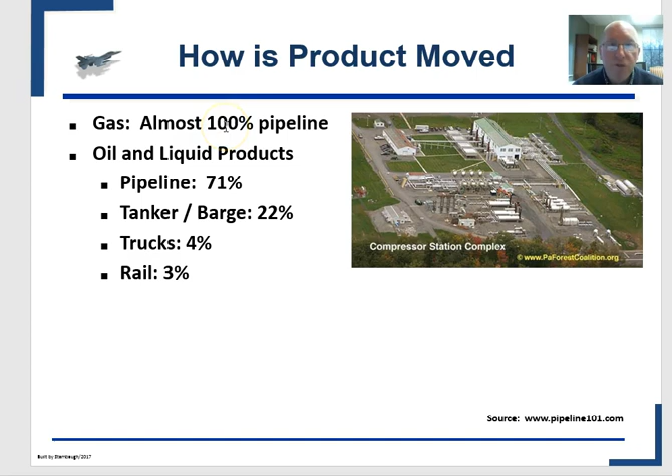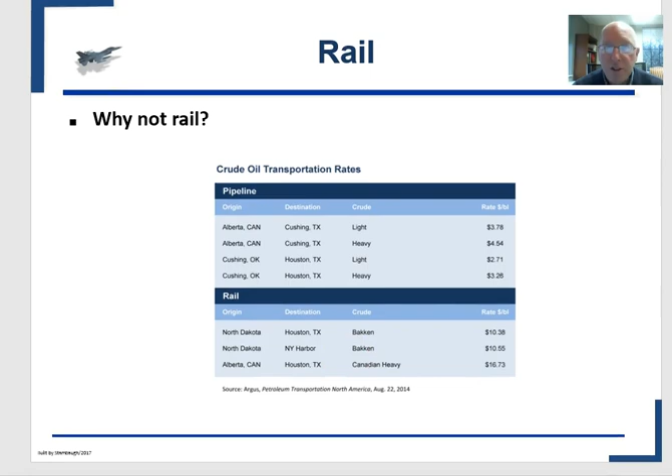Let's start with the midstream industry. I want you to remember, proportionally speaking, what products get moved more by pipeline than others. Also remember our class discussion on why rail shipments took off, and remembering the discussion about the economics of rail versus pipelines, and the safety records, will help you answer those questions.

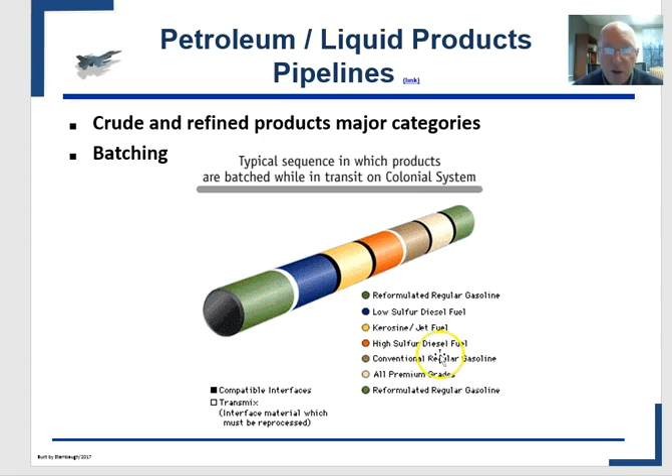So the slides I'm flipping through obviously mean they're not the source of a question. There might be a question about batching on the exam. I don't know why that one's being so frustrating.

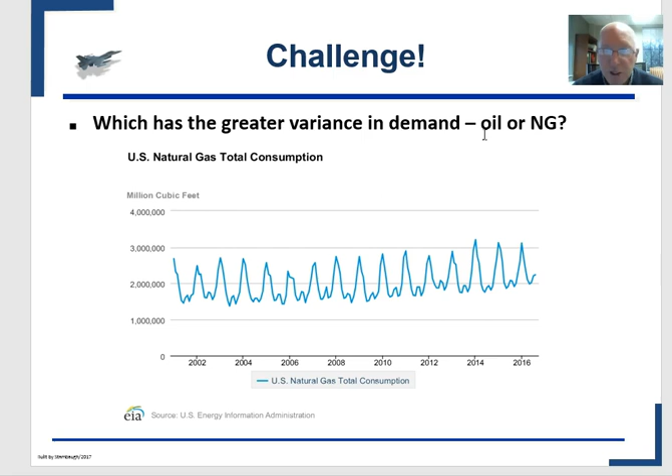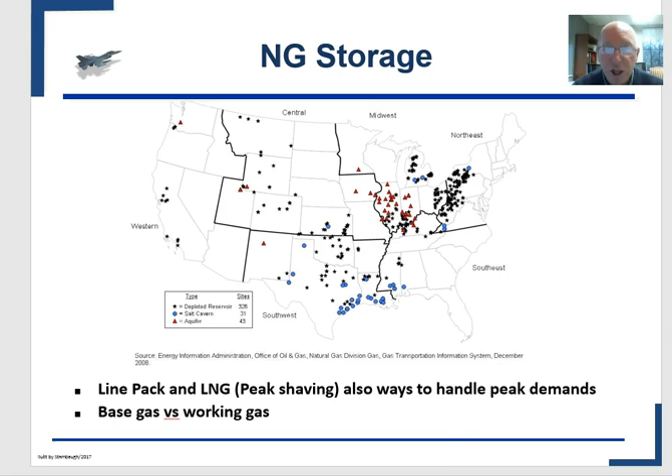Okay, this is another source of a question. What has greater variance in demand on a daily basis, oil or natural gas? Obviously, it's natural gas. So think about ways the industry handles that daily variation. As I make this video, it's snowing outside, so it's a cold day. All of us are using a lot of natural gas today, probably. At least my house is heated by natural gas. And so we see that practically put into place.

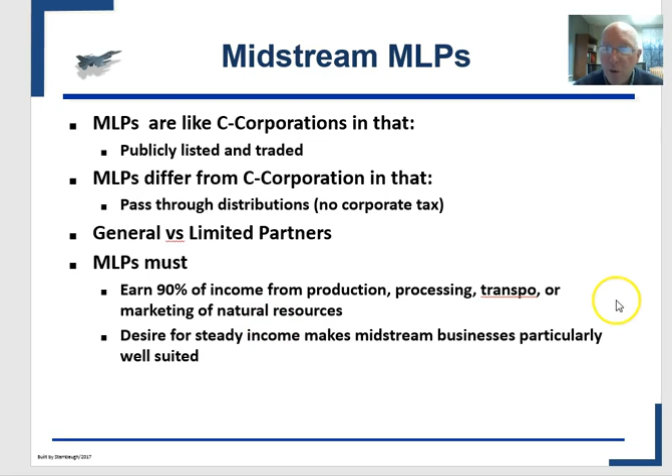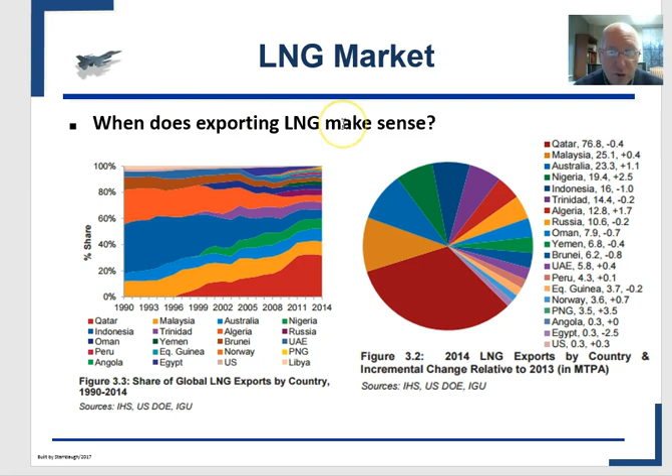As far as the LNG market, there is a question on it, and you're going to want to understand when it's good or logical for a country to export LNG, and when it's logical for a country to import LNG. Some of the major players in both of those markets would be good to know.

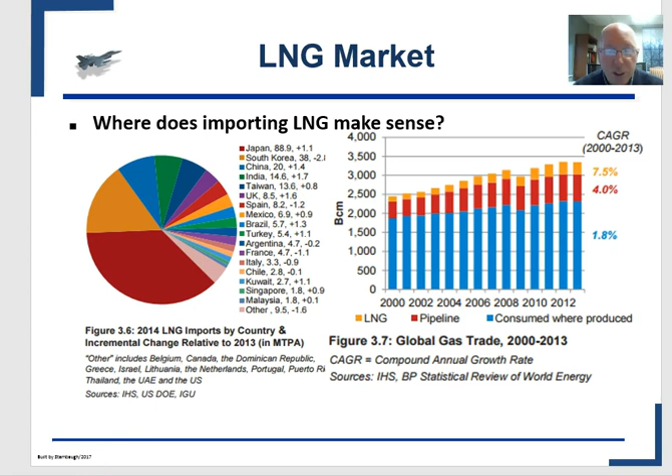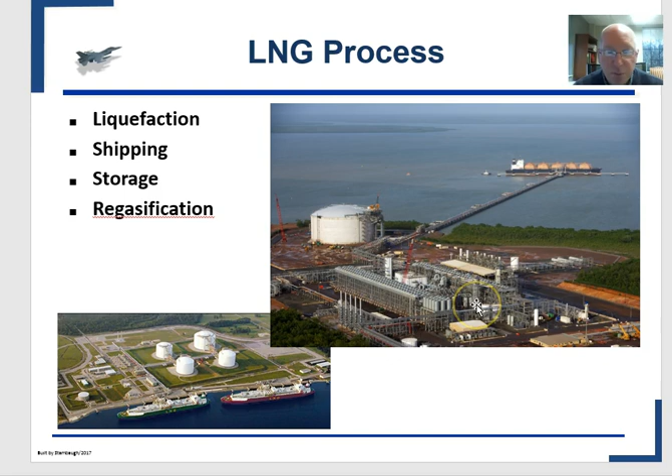One other thing good to know about LNG is that the most expensive part of the process is the liquefaction. This is the liquefaction plant in Sabine Pass on the Gulf Coast, and this is where all the bucks are in the LNG process. It's relatively easy to regasify it once it gets to its destination.

Now we turn our attention to the downstream industry. I do want you to know some of the physics and the business of the refining process. I'd like you to make sure you know where the refineries are clustered, and especially that the majority of them are on the Gulf Coast of the United States.

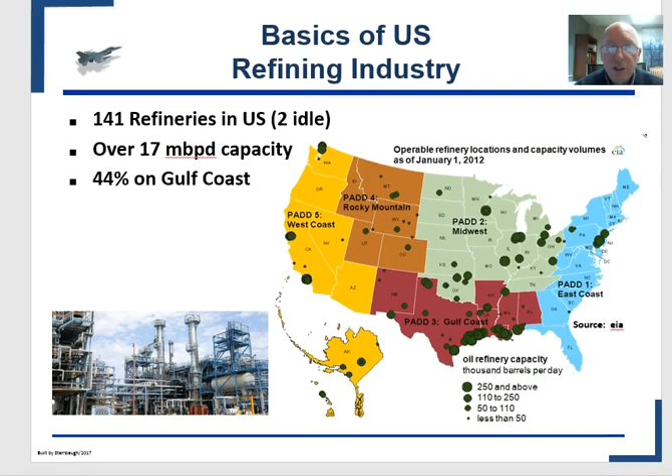Don't need to know this sort of stuff. I do want you to be familiar with the product slates and the basic functions in the distilling industry. Just keep in mind, too, the value—these are the high value products, sometimes called light distillates, not very often. Gasoline is by far the one produced in the most quantity and is the most valuable. Then you have jet fuel and diesel fuel—these are called the middle distillates, and I'll show you that on a chart. This is the real heavy stuff, and it's less valuable.

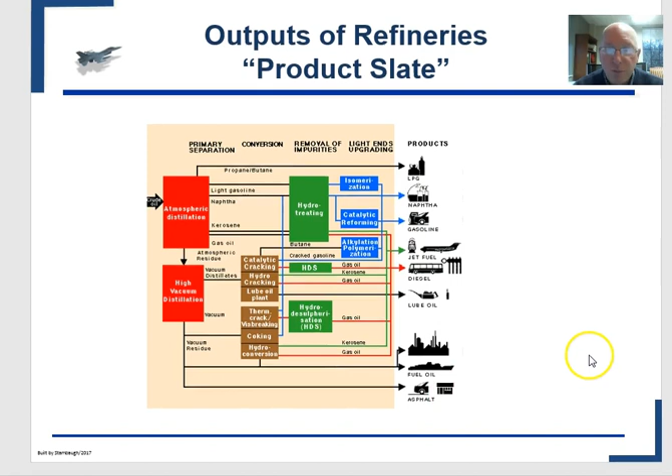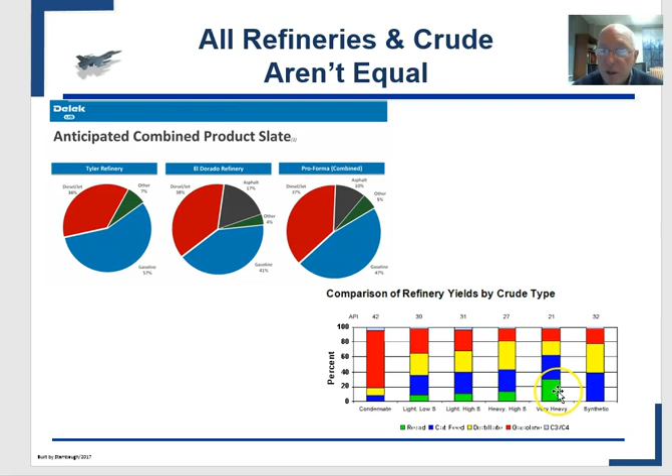Then as you go to heavier or more sour crude, you see the percentage of gasoline goes down, and typically middle distillates go up, although here, this very heavy crude produces a lot of the very heavy byproducts, like asphalt and things like that.

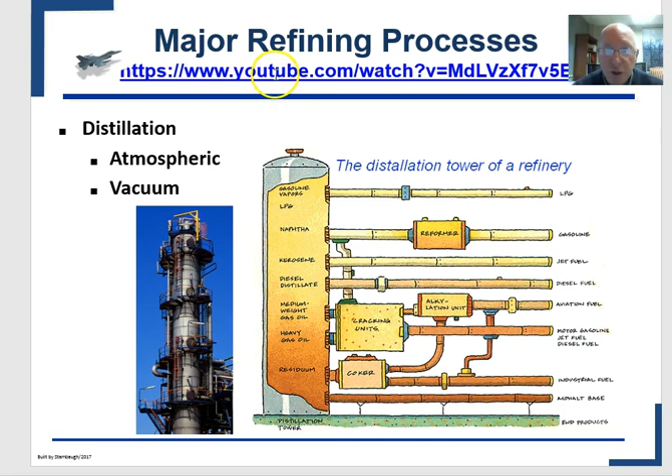Now for processes, you need to remember that the first stop is the distillation towers, and have a basic understanding of what distillation is, so you can rewatch this video if you'd like to. Then keep in mind on the next slide, cracking.

This is where you put a lot of energy into it, but I want you to understand that the basic purpose of cracking is to produce more high value products from a barrel of oil, particularly more gasoline. You're trying to get more gasoline out of a barrel of oil by taking some of the stuff that might not be as valuable—a middle distillate, or even worse than a middle distillate, some of the very heavy products—and putting it through the cracking process to make more gasoline.

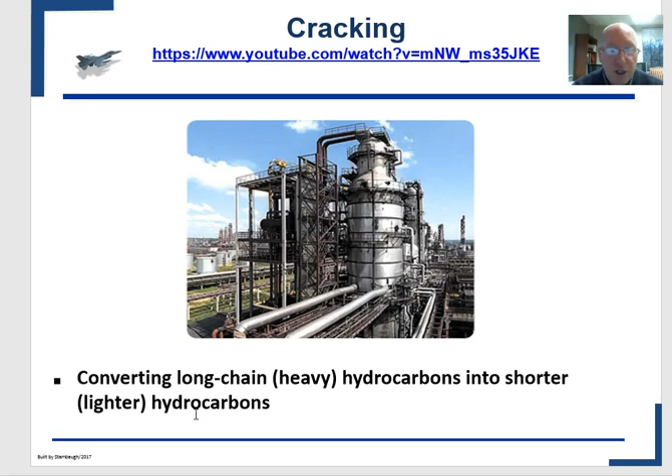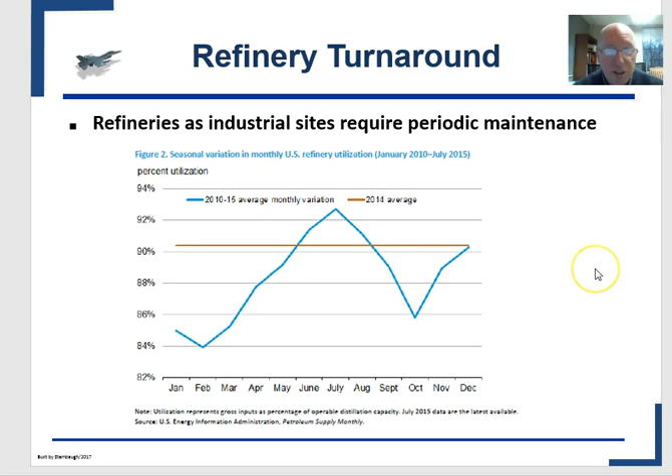Moving on, don't need to worry about that. I do expect you to remember that refineries are very busy places, on the order of 90% utilization for a year, simply because it's a very expensive capital asset, so you want to use it. Nothing else to be seen here. That's it for the downstream industry.

Shifting to the regulatory environment, I decided to start at the summary slide. One key takeaway is that state law, for the most part, guides oil and gas E&P operations. They set the rules for leasing, well spacing, pro-rationing, and those sorts of issues.

Federal law, there's a lot relating to environmental and safety issues. Even though states can have guidance on those issues, these are the areas where federal law tends to be most dominant. I also want you to particularly remember, go back and rewatch the video if need be, what was found from the 2017 EPA study on fracking. Be aware of that. Those are the two issues from the regulatory slides.

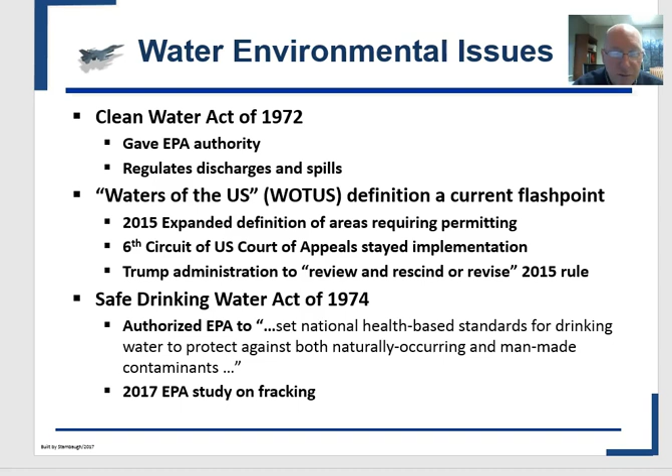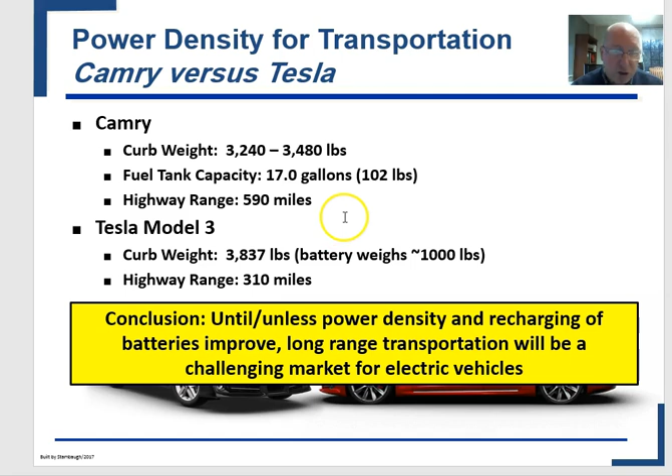On to renewables. We talked about the idea of power density, which is how much energy something can have per pound. This is the real issue with long-range transportation vehicles, the power density of renewables, the batteries in electric cars, and believe it or not, they're starting to have some electric airplanes. They're just not enough for long-range transportation under the current formulation. This idea of power density is important to keep in mind.

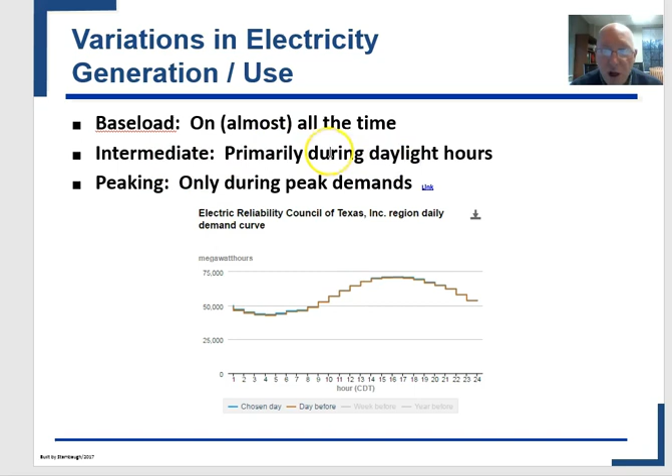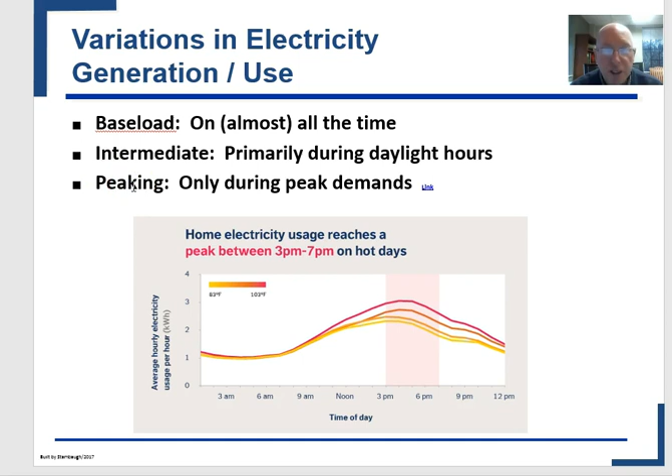We also talked about electricity usage and how power demand varies throughout the day. Base load sources are basically always on. Intermediate sources come on to take care of the normal daily bump, and peaking sources handle hot days when power requirements are at their absolute peak. So base load runs all the time, intermediate runs not all the time but on predictable bases, and peaking runs only when you really need power to keep up with a spike.

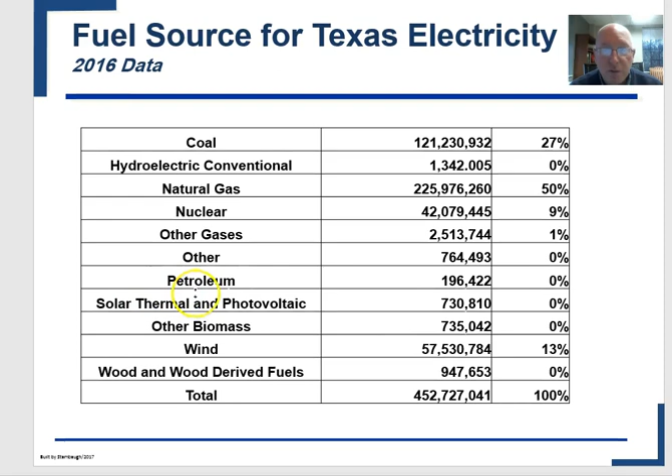Moving on, a familiarity with this might be a little helpful, but there's not a direct question from that.

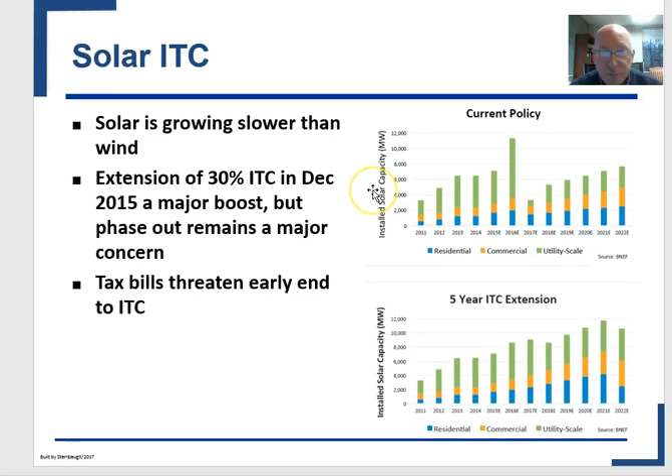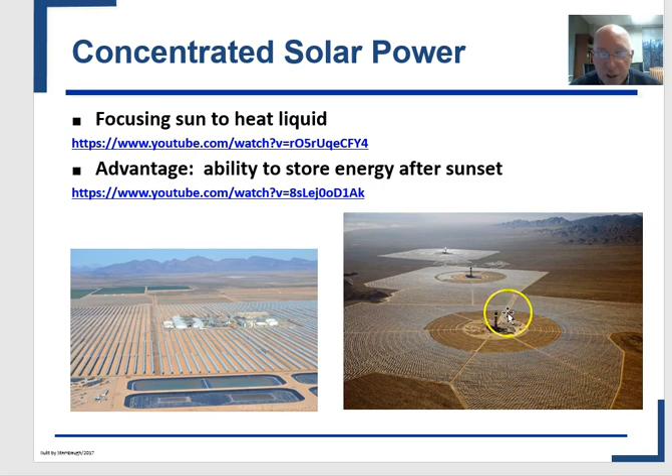I contrasted for you concentrated solar power versus photovoltaic. The real takeaway is that concentrated solar has the disadvantage of being more expensive than photovoltaic, but it has the ability to store energy after sunset, because once the material is warm it can generate power for a while. Photovoltaic has the benefit of being less expensive and more flexible.

For wind, know that the current production tax credit is 2.3 cents per kilowatt hour. That will be important to help you think through some of the questions.

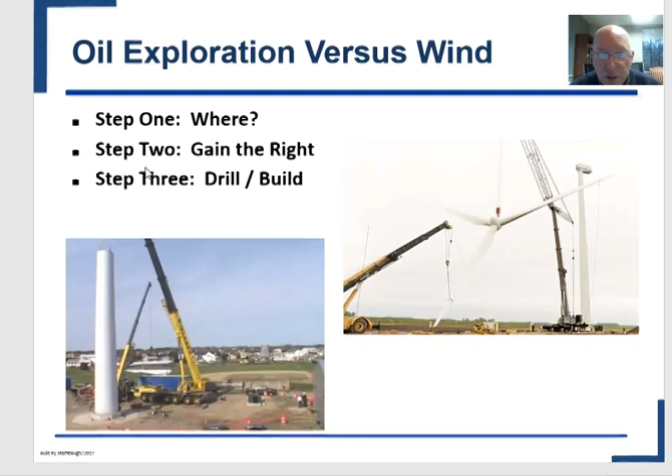I'm skipping over slides that you should already be looking at because they will help you with the longer answer questions I've already talked about.

Make sure you know this rule of thumb: it costs between 1.2 and 2.2 million dollars per megawatt to construct a wind turbine. So if I were to build a 5 megawatt generator, and I'm not sure they're even possible to build that big, I would multiply 5 megawatts times 1.2 to 2.2, which suggests how much that turbine would cost - in other words, between 6 and 11 million dollars.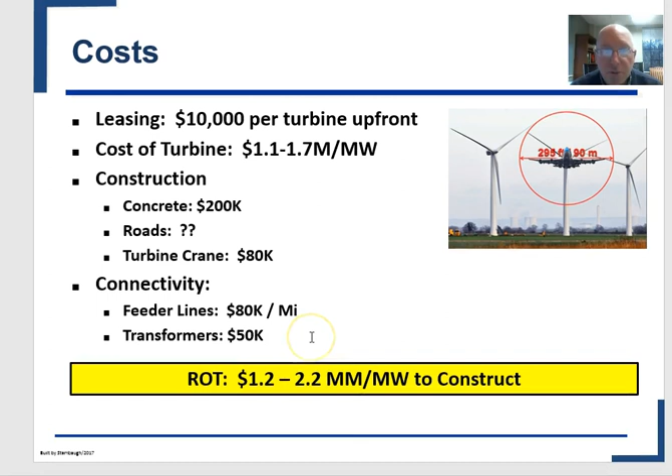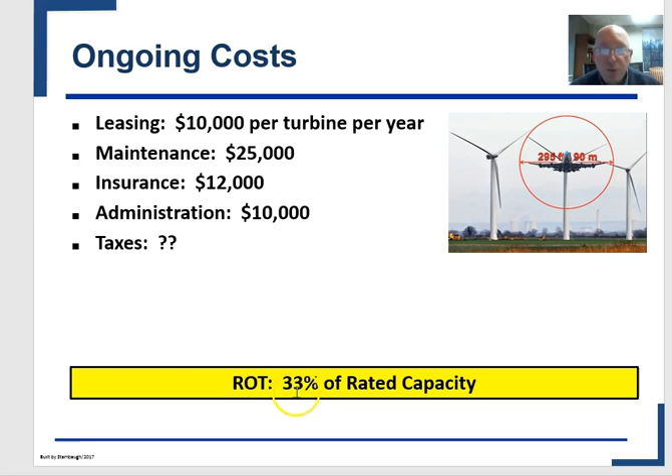Also know that turbines, simply because the wind doesn't blow continuously throughout the year, tend to generate, as a rule of thumb, about 33% of their rated capacity. So if it's a 2 megawatt generator and you multiply it times 24 hours a day times 365 days a year times 2 megawatts, you really get about 33% of that energy.

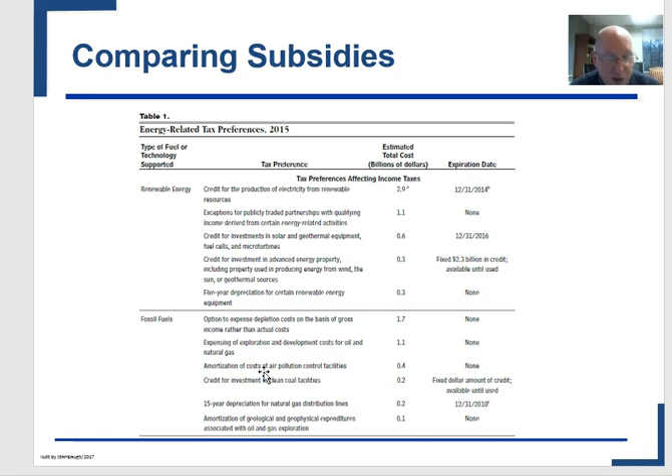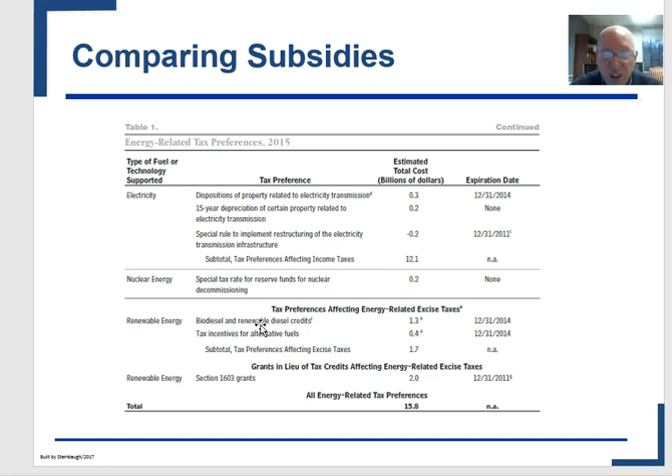Levelized cost of energy is a good thing to understand. I'll do the math for you. Remember that if we add up all the fossil fuel subsidies, they add up to about $3.5 to $3.7 billion a year, depending on how you do the math. If you add up all the renewable subsidies, that adds to about $9 billion a year. I'm not making a political statement there - I'm just saying that when people talk about subsidy this or subsidy that, you should know the figures and the categories under which they're being subsidized.

I think that's got it covered, but let me double check. Hang on. Okay, that should cover it. You'll be in good shape for the exam.